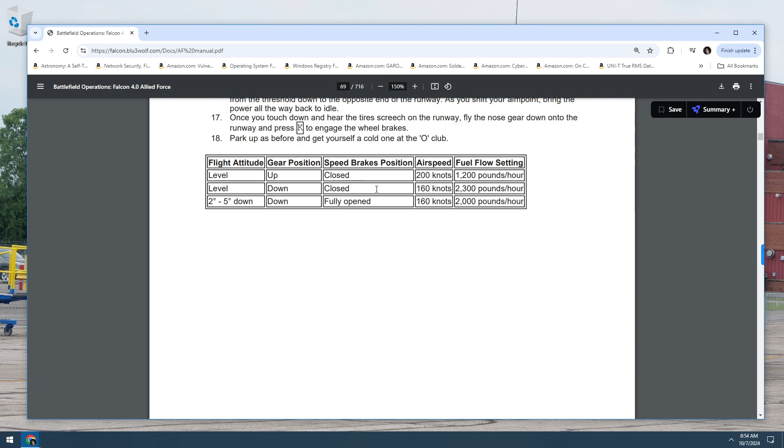We just finished mission 10, which was basically instrument landing, so ILS approach and stuff like that. Now we're going to do the last landing tutorial or mission, which is mission 11, or flameout landing.

So it says a flameout landing is basically where you lose your engine. It's pretty rare, but it does happen especially if you have battle damage.

So it says, picture this. You're flying home from a successful mission. You have long since forgotten about that pesky warning from the jet's voice warning system, when suddenly you notice that things are getting very quiet. You're shocked to notice that the motor is not, well, motoring, or the engine. You are a glider. Your heart sinks into your stomach as you realize that you should have paid attention to that fuel low warning.

Your only options now are to jump out or crash, right? Wrong. Depending on your altitude, you may be in a position to make a flameout landing on a nearby runway. The F-16 can land without the engine if you are within gliding range of a suitable airfield.

This type of landing in a jet is frequently called a dead stick landing. But it is not an accurate term for the F-16 because you must have electrical power to land the aircraft. The FLCS, or flight control computer system, needs power.

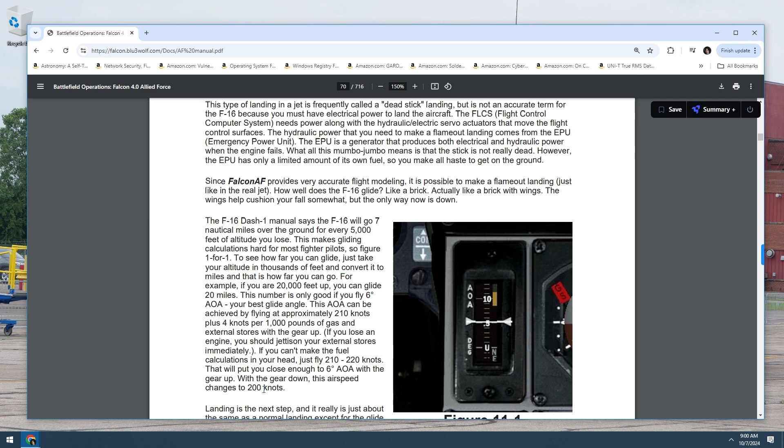With the gear down, this airspeed changes to 200 knots. So landing is, let's see, do they have figure 1-1, 11-1 shown?

So this is figure 11-1. Basically this is your AOA. This is 5 degrees, and this is basically like 5, 6. Let's see, 1, 2, 3, 4, 5. So 5 is here, so you want to be about 6 here.

Landing is the next step, and it's really just about the same as a normal landing, except for a glide path. A normal glide path is 2 to 3 degrees, while flameout glide path is 11 to 17 degrees, as seen in figure 11-2.

So 11-2 is here. Fly the jet on this glide path to maintain the proper airspeed throughout the approach and landing. Because of your steep approach and lack of thrust, you will need the increased airspeed to execute a flare and slow your descent rate. Remember that our normal flare for landing is at approximately 11 degrees angle of attack, whereas this flare for a flameout landing starts at 6 degrees angle of attack. Since this is a 50 knot airspeed difference, it takes some practice.

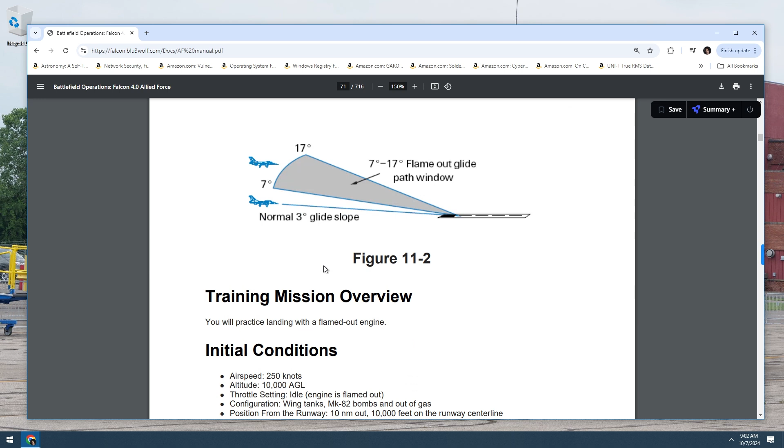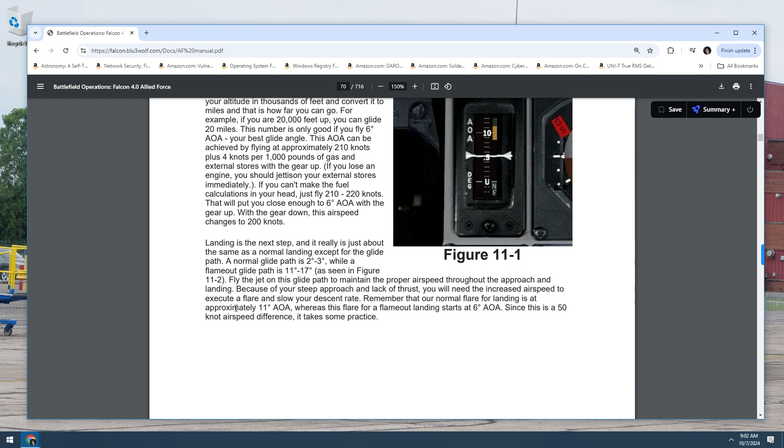Right, so this is figure 11-2. Basically what they're saying is the normal 3 degree glide slope is here when you have an engine. So it's a 3 degree glide slope all the way down to the runway with like 11 degrees AOA. But if you have a flameout landing, it's 7 degrees to 17 degrees glide path window.

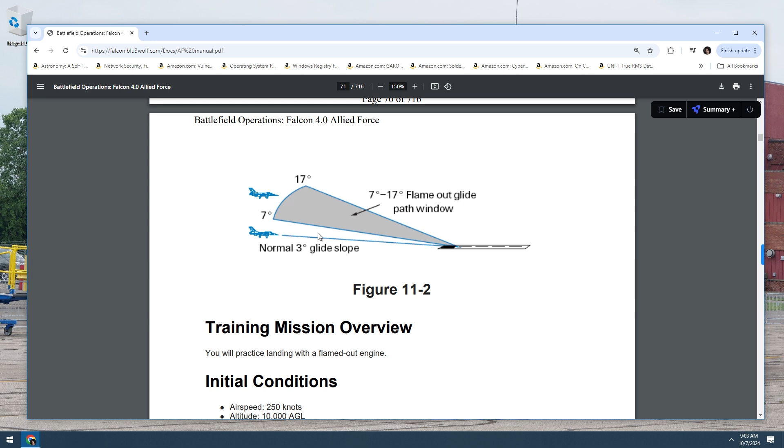So basically what they're saying is, when you have an engine, your 3 degree glide slope is here, and you have the normal flare for landing at approximately 11 degrees AOA. So when you flare, you'll be at like 11 degrees. You'll start your flare at 11 degrees AOA with a normal landing.

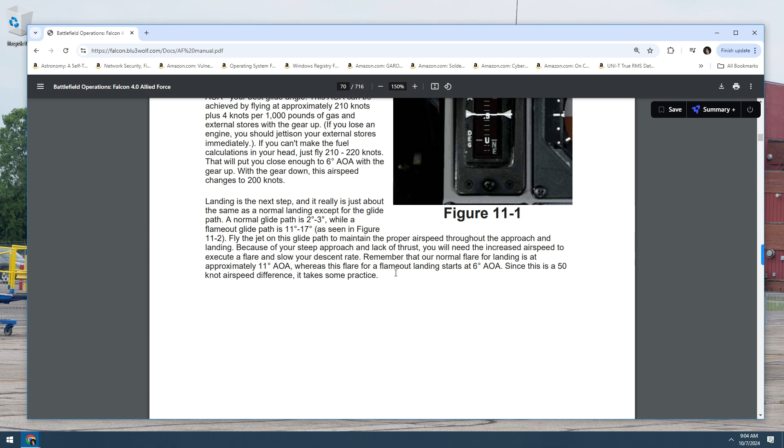However, if you have a flameout landing, you don't want your AOA at 11 degrees from the start, because you'll just stall. You'll lose a lot of airspeed doing that. So you need to have it less, you need to have the nose down to the ground a little bit more, so you can keep that airspeed, so that when you are at flare height, you can go from 6 degrees to whatever you need to flare.

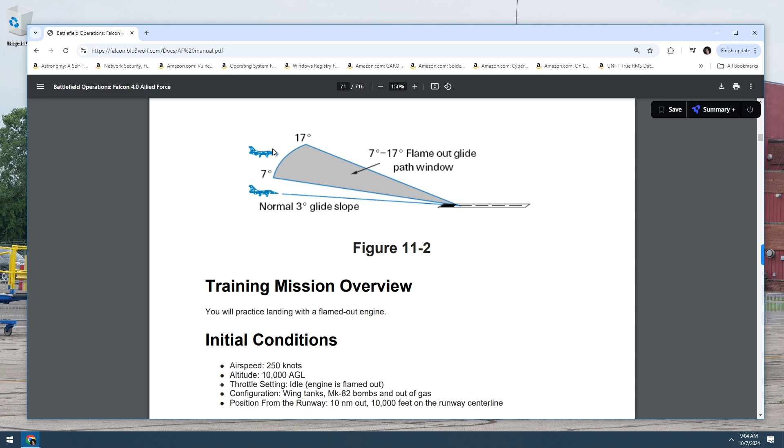So flameout glide path window is 7 to 17 degrees. This would be if you're higher up. If you're lower, it really depends on your altitude and stuff, but you have to judge it based on your altitude. Again, this basically says that you need to fly at a certain speed constantly in order to not stall the jet and achieve the proper glide path to achieve the longest distance you can with no engine based on your altitude.

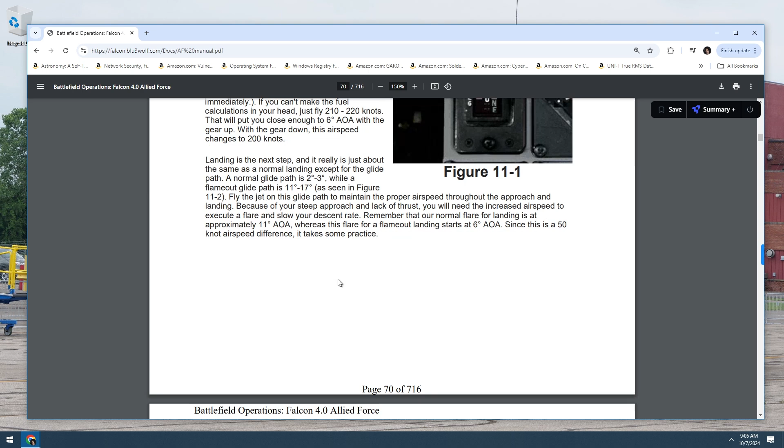Training mission overview: you will practice landing with a flamed out engine. Initial conditions: airspeed 250 knots, altitude 10,000 feet AGL, above ground level. Throttle setting idle, engine is flamed out. Configuration: wing tanks, Mark 82 bombs, and out of gas.

So we have external fuel bags on, we have Mark 82 bombs, and we're out of gas. So position from the runway: 10 nautical miles out, 10,000 feet on the runway center line.

Mission description: you will start at 10,000 feet with the runway 10 miles on your nose. The jet will be out of gas and the engine will be flamed out. You will hear a caution call shortly from the voice message system. Press the master caution button to acknowledge the warning. Furthermore, the HUD displays a flickering fuel warning message.

Eventually you will also hear an ongoing warning call from the VMS. Press the warn reset button below the drift cutout switch, or press Ctrl Alt Shift Whiskey to turn off the warning.

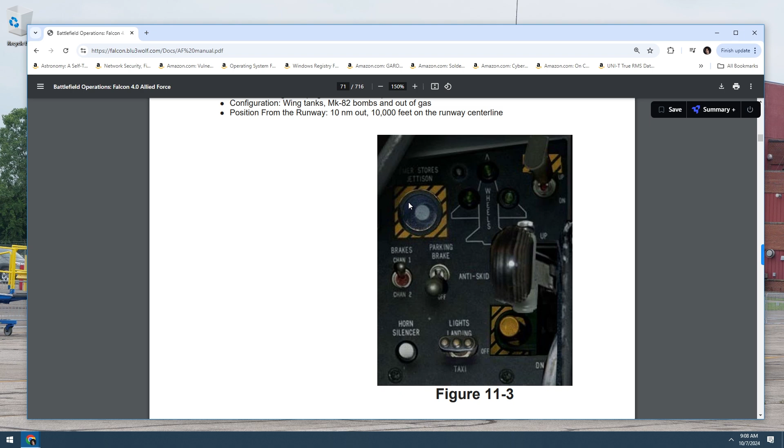Perform the following steps to fly a flameout approach. Step 1: load training mission 11, flameout landing, from the training section. Step 2: jettison all of your external stores by pressing Control Juliet or by pressing the Stores Jettison button next to the landing gear lights, figure 11-3. So right here, once the stores are gone, step 3: check your angle of attack gauge and fly 6 degrees angle of attack, approximately 210 knots.

Remember, the only way you can speed up or slow down the jet is with pitch. If your angle of attack is too high, meaning you are too slow, push the nose down to speed up. If the angle of attack is too low, meaning you are too fast, pull the nose up to slow down.

Step 4: find the runway out on the horizon. Fly 210 knots toward the runway and note your glide path. In order to keep your airspeed at 210 knots, you need to be in a shallow dive, meaning you don't want a high angle of attack with the nose up.

If this dive is between 11 to 17 degrees, then you have enough energy, altitude, and airspeed to make a flameout landing. If you are less than 11 degrees, you may make the runway, but at glide paths less than 11 degrees, it depends on the winds and just how far below 11 degrees you are. So you don't want the degrees to be too high, but you also don't want it too low, because you might actually miss the runway - you'll be too low.

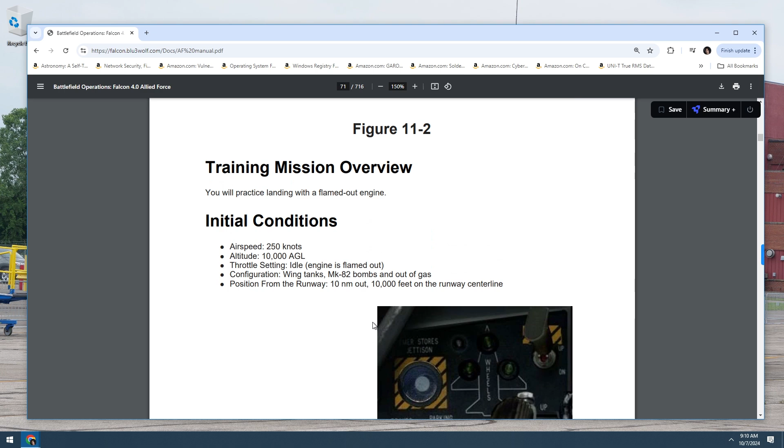How do you know what glide path you're on? By the way, if you're wondering why 10,000 feet AGL would work with 10 nautical miles out, it's just the calculation here: if you're 20,000 feet up, you can glide 20 miles. So 10,000 feet up, you can glide 10 miles, and the runway is 10 nautical miles out, so it's perfect.

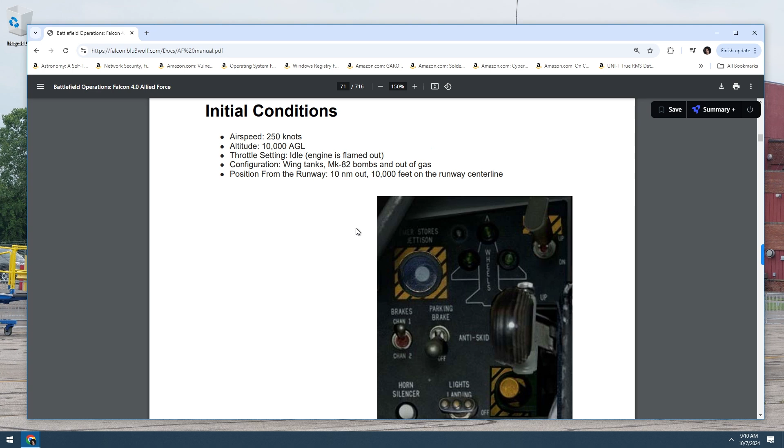How do you know what glide path you're on? The best way is to know the position of the flight path marker on the HUD pitch lines. When the flight path marker is on the near end of the runway, you can read your glide path on the pitch lines. For example, if the flight path marker is on the -5 degree line, you're on a 5 degree glide path. Figure 11-4 shows the jet close to an 11 degree flameout approach.

Step 5: make small bank angle changes to align your flight path straight down the runway. Once you have everything under control, press Tango to talk to the tower. Declare an emergency landing by pressing 3. Remember that you should always fly the jet first and talk on the radio second. Repeat the mantra: aviate, navigate, radiate.

It should be: aviate, navigate, communicate - fly first and foremost, know where you are second, and talk about it last. The tower does not have a sky hook that they can use to lower you to the ground safely. They're just sitting in air-conditioned comfort, drinking coffee, listening sympathetically to your problems. You have to fly the jet, so if you don't have time to talk to them, don't.

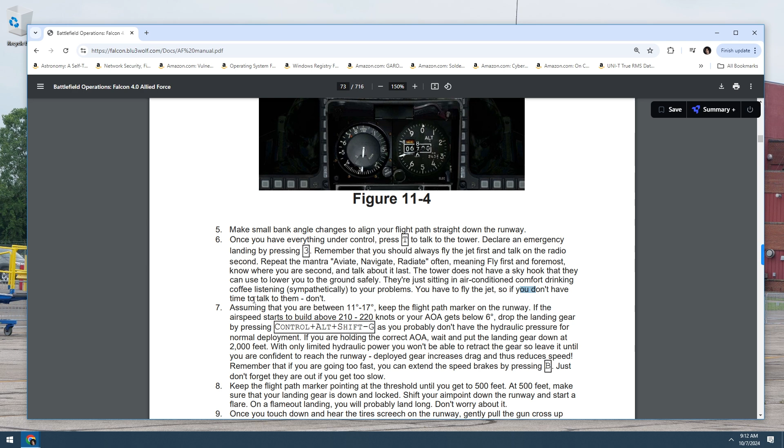Step 7: assuming that you are between 11 degrees and 17 degrees, keep the flight path marker on the runway. If the airspeed starts to build above 210 to 220 knots, or your angle of attack gets below 6 degrees - so 5 or 4 or something like that - drop the landing gear by pressing Control Alt Shift Golf. This is your alternate gear handle, because you probably don't have the hydraulic pressure for normal deployment.

If you are holding the correct angle of attack, wait and put the landing gear down at 2,000 feet. With only limited hydraulic power, you won't be able to retract the gear, so leave it until you are confident to reach the runway. Deployed gear increases drag and thus reduces speed. Very important: remember that if you're going too fast, you can extend the speed brakes by pressing Bravo. Just don't forget they are out if you get too slow.

Step 8: keep the flight path marker pointing at the threshold until you get to 500 feet. At 500 feet, make sure that your landing gear is down and locked. Shift your aim point down the runway and start a flare. On a flameout landing, you will probably land long - don't worry about it.

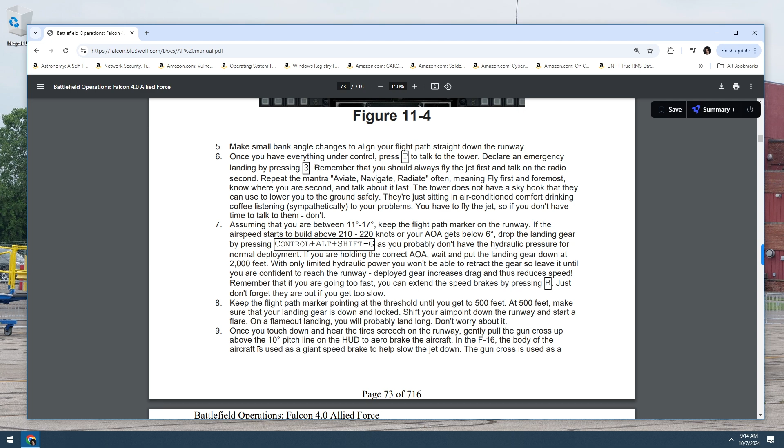Step 9: once you touch down and hear the tires screech on the runway, gently pull the gun cross up above the 10-degree pitch line on the HUD to aero brake the aircraft. In the F-16, the body of the aircraft is used as a giant speed brake to help slow the jet down. The gun cross is used as a pitch reference during the aero brake because the flight path marker gets unreliable once you touch down on the runway.

When the jet finally slows up below about 100 knots, the nose will fall through to the runway. Again, be sure the throttle is all the way back to idle, since your engine will not always flame out in the exact right spot for an 11 to 17 degree, 210 knot glide path.

Figure 11-5, Step 10. If you make this, stop where you can and get yourself a few cold ones at the O Club. Here are some suggestions for making the runway. If the runway is rising in your HUD and your airspeed is bleeding off, you will not make it to the runway.

It will take about 7,000 feet of altitude to execute a 360-degree turn. If you're high with an extra 7,000 feet, do a descending 360. If you're high above the 11 to 17 degree glide path but not high enough for a 360, use speed brakes and S-turns to get back to the proper 11 to 17 degree glide path.

Always remember, it's easy to lose speed and height, but gaining it back is not. Err on the side of too high and too fast. It's better to run off the end of the runway at 40 knots than to miss the start of the runway at 160 knots.

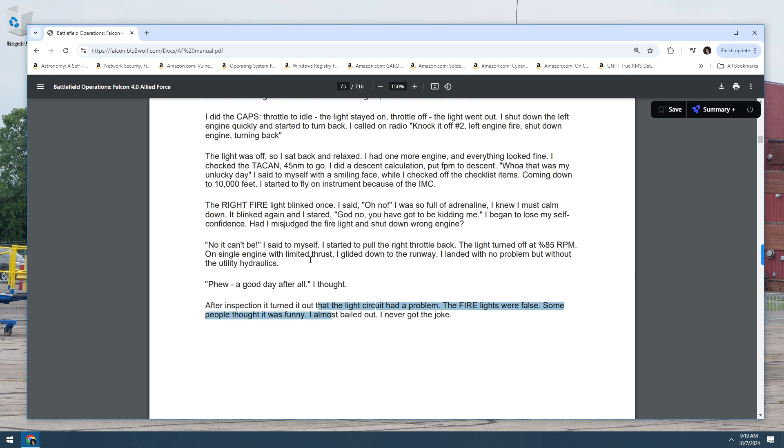After inspection, it turned out a light circuit had a problem, the fire lights were false. Some people thought it was funny. I almost bailed out and never got the joke. Yeah, that's not funny at all. So he shut down his engine when it was fine. Oh god, that's horrible. The engines were fine, and... oh shit, that sucks.

Alright, that's it for Mission 11 in the theory. Now we're going to get into Falcon 4.0 Allied Force and continue on.

Alright, we're in the sim. No blackout, no collisions, everything looks good. Get a drink first. Alright, training. Step 11, flameout landing. I did this before, a long time ago, back in 2011 or whatever, and I did it a couple times.

You need to know how to safely put your jet back on the ground even after you've lost your engine. This is a balancing act between airspeed and altitude. Alright, so we are 10 nautical miles out, we are in Delta Block 52. Munitions as you see here, we can't change it, that's awesome. Alright, so that's what we got, let's do it.

One thing it didn't say in there that you need to check is that your EPU is on. You need to check that your EPU is running and it has a green light on. Alright, so I'll show you what to do here. There's no need to use a throttle, you just use your stick because you don't have an engine.